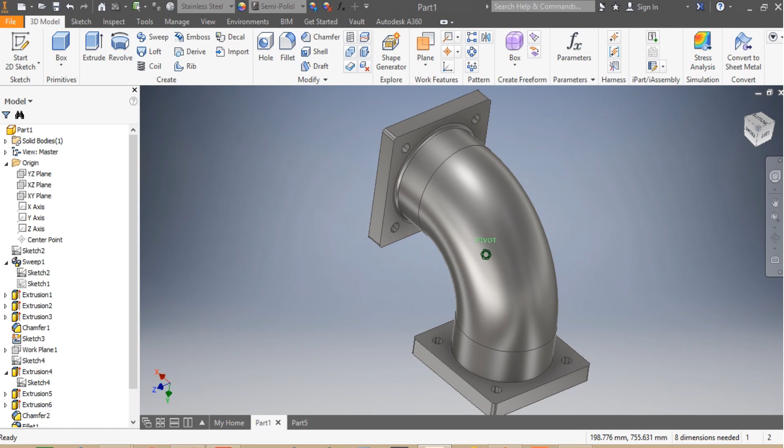Hi, today we're about to do the modeling of this elbow that you're seeing in front of you. I'm going to show you the dimensions. As you can see on the sketch, the dimensions are in millimeters, so I'm not going to waste any time.

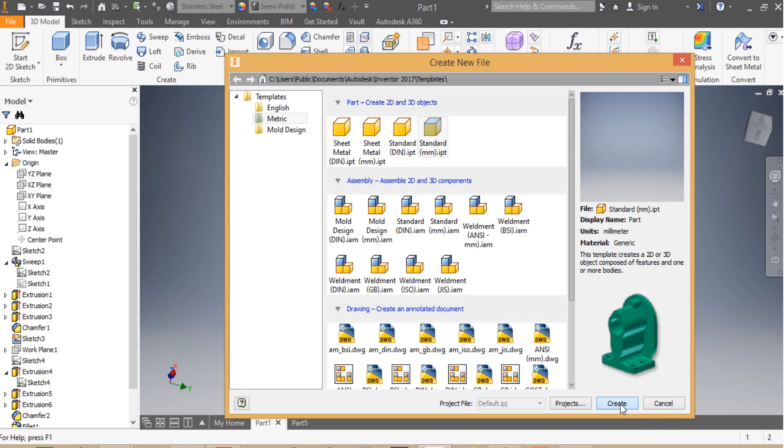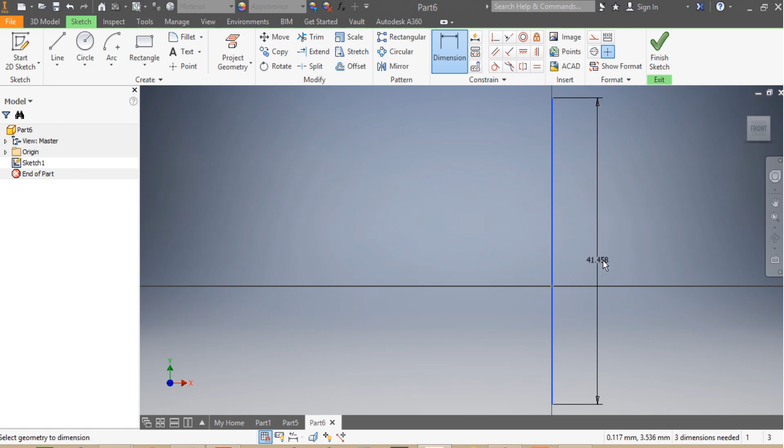What I'm going to do is go up there and select new sketch. Since dimensions are in millimeters, we're going to select that. Here I need to make sure about my drawing origin, so it needs to be in the XY plane. So here I have to draw this line, remember this line is just for guidance, and now I want this one here to be 900 millimeters.

Once I get this right, what I'm going to do next is draw the axis, because for this drawing I need to use the sweep function. That's why I need this to be 150 millimeters, so that is 150 millimeter, 150.

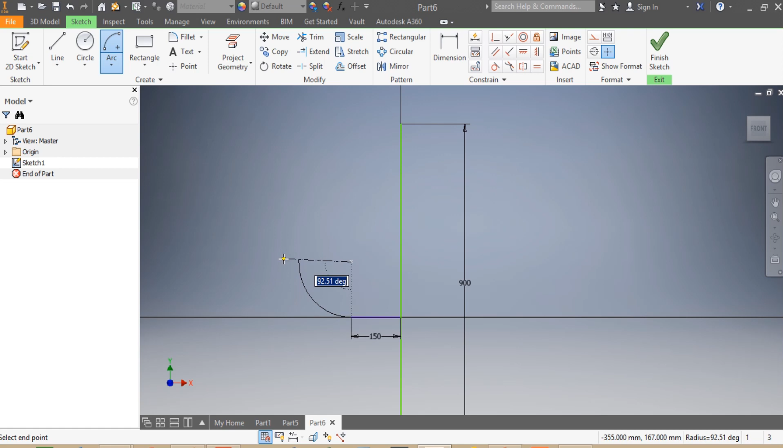I go there, then I draw this arc, which is still part of the axis. That one needs to be 260, that needs to be 260 millimeters. So that is done, I need to make sure now that my arc is tangent to my line.

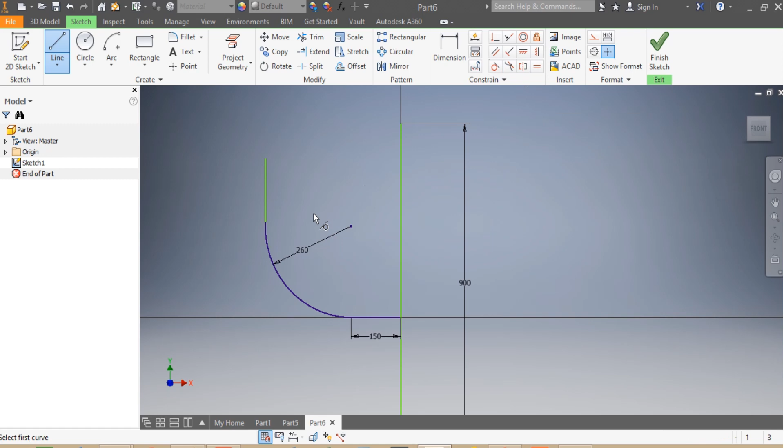The next thing I have to do now is this other line. I need to draw this line, that is my line, and I need to make sure, even though I might know that it's tangent, I need to confirm it. So that needs to be tangent to that one, correct?

Now I have to trim the excessive part. That is excessive, I need to trim it. The next thing I have to make sure about is the dimension, so that one needs to be 150 millimeters.

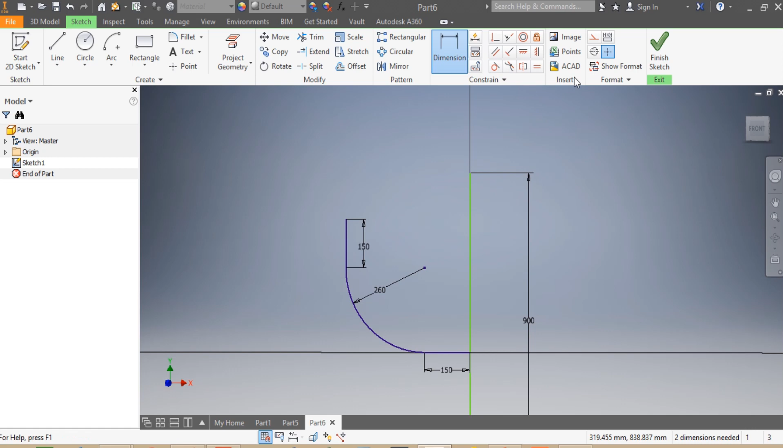Once that is done, what I need to do now is put that one there. Escape. I need now to put this one here as an axis, so that's an axis, so that's one there. I click there, this one as well, I click there. Since that is done, I go and say finish sketch.

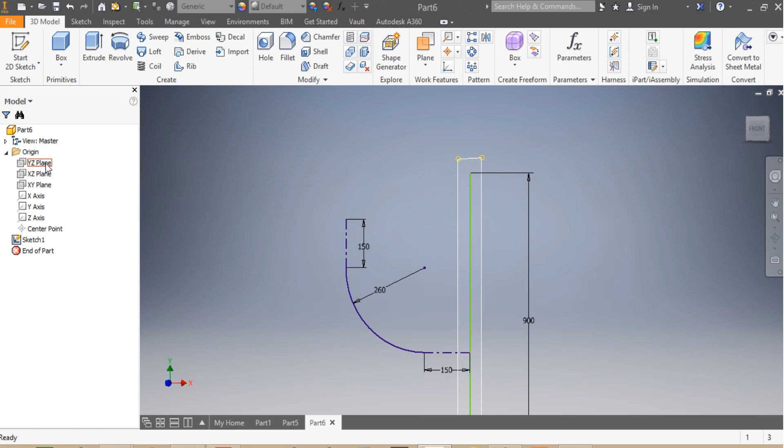Then I come here on the origin, so I need to draw the profile. I need to draw the profile, and then I say new sketch. Then I come here, the next thing that I do again, I just draw my line. So my first, escape, my second, that is my second.

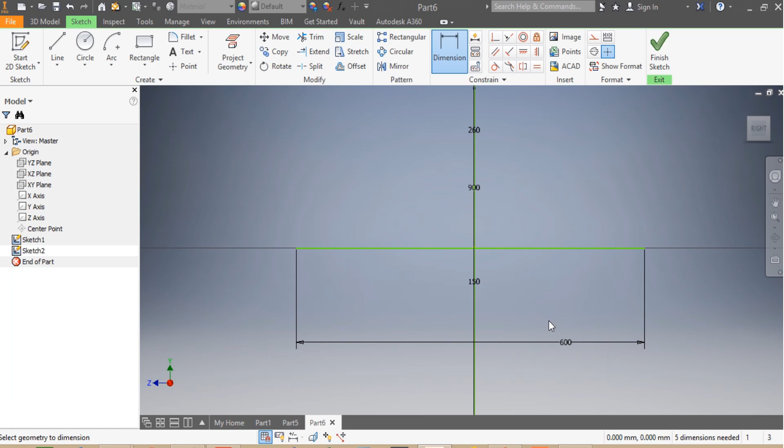Escape again. The next thing that I'm going to do now, let me just give dimensions to my line. So that's one, let me make it 600. It won't kill the cat. 600, so that's one, 150 is fine.

Escape, and then here I'm going to draw my circle, my first, my second, and this one here needs to be 290. That one needs to be 290, so that is 290 as per my sketch. And this internal diameter, that one needs to be 210, so that is 210. So now I get that one straight.

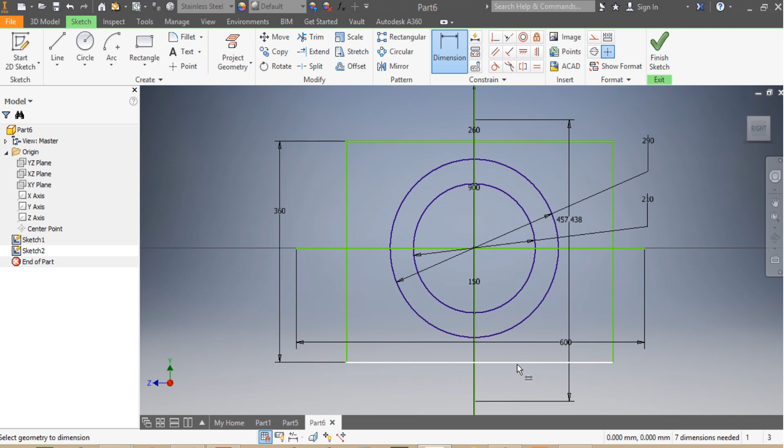The next thing that I have to do, I need to draw my square. There is my square, as you can see there. So this part here, I need to draw that part. And those sizes according to the drawing need to be 360, so that needs to be 360, and this one needs to be 360 as well.

That is done. The next thing now is to make sure about the symmetry, so that needs to be 180. So that needs to be 180, and this one as well needs to be 180, so that needs to be 180.

This might take time, but don't worry, you're going to get there. So I need to draw this one back there, I need to drag it back, I need to drag it back there, so I'm going to drag it back there.

That is done. The next thing that I need to draw now are my holes, the holes to have the elbow fixed wherever it needs to be fixed. So my third circle, my fourth, don't worry, I'm going to fix all of those things, the internal ones, I need to get those right.

And then I need to give dimensions, so that one needs to be 30 millimeters, so that needs to be 30 millimeters. This one here needs to be 60 millimeters. This here needs to be 30, that one needs to be 60.

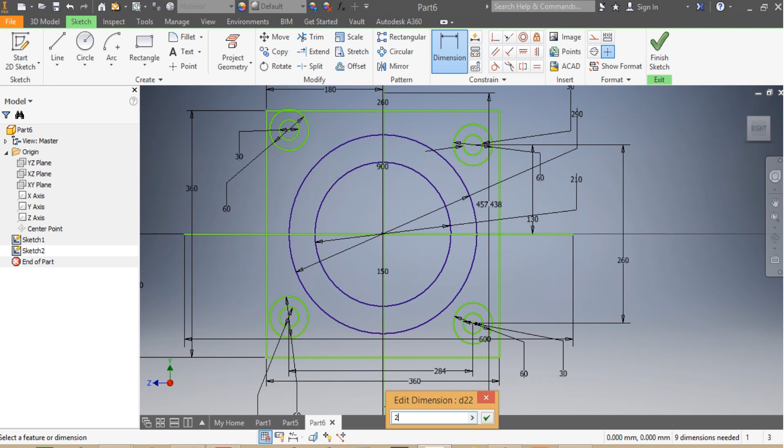130. So the same thing must be applied here. So from there to here, that one needs to be 260 millimeters. Now from there to here, that one needs to be 130. Right, so that needs to be 130. And again, from there to here, that needs to be 260, right? So 260.

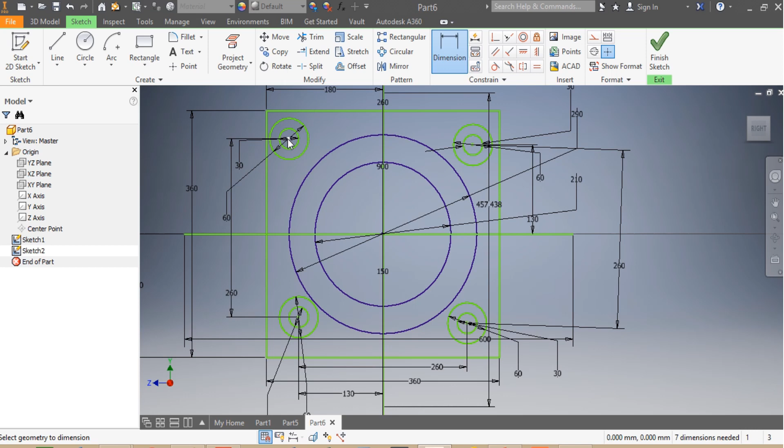And here, that needs to be 130. And the same thing applied there. So from there to here, that needs to be 260. And here, that needs to be 130.

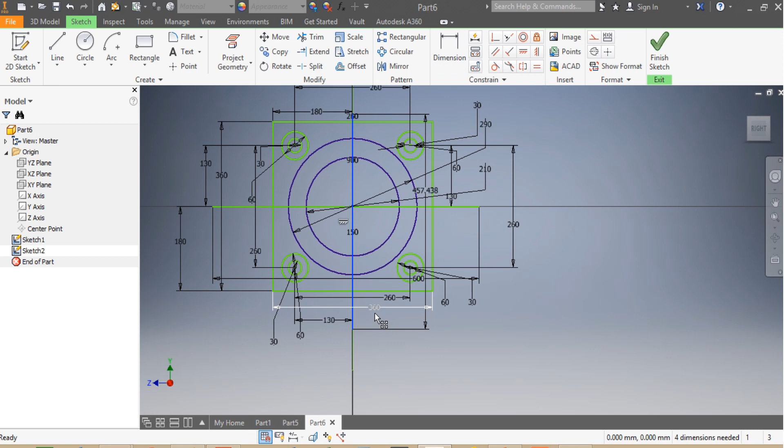Great, so that is done. Okay, everything is done now, everything is great. So I'm happy with what I'm seeing in front of me. So now what I'm gonna do is I'm gonna say finish sketch.

So once I say finish sketch, what I'm gonna do next is come here and press the function sweep. There is a profile. I'm gonna select my profile, the path, that is my path. Okay, then I want it to go the way it's going, and then from there I'm gonna say okay.

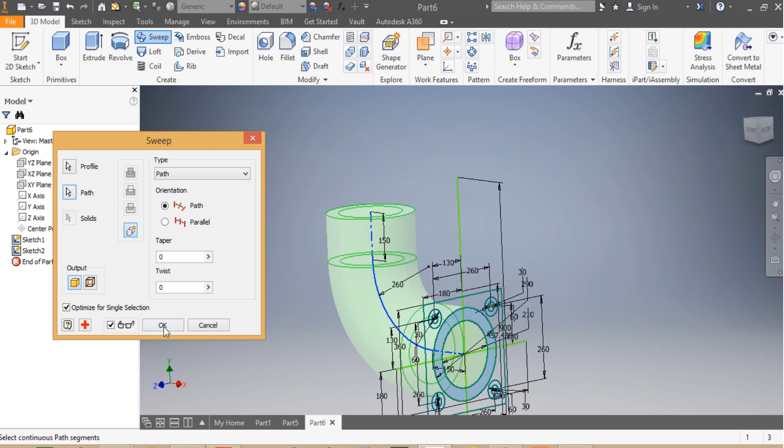So the next thing that I want is to see my sketch. I want my sketch to be visible. Once it's visible, I go on Extrude. I click there. Okay, I want this one to go back.

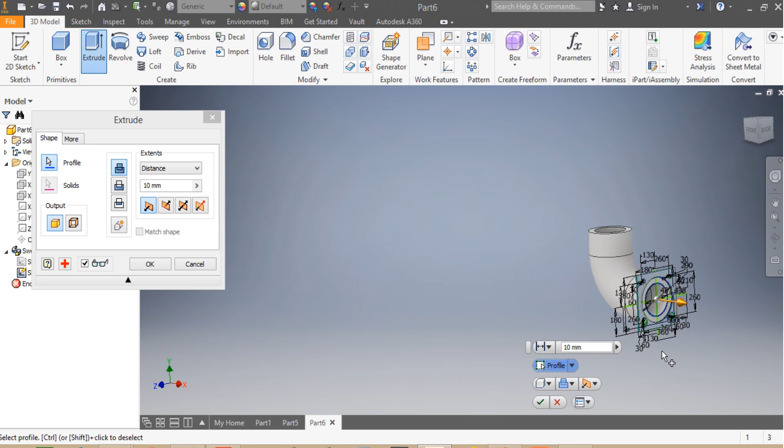Let me even choose this. Come here. You too, don't worry, you are part of the team.

So I want it to go back to be extruded by 50 millimeters, and I want it to be extruded the other way around, not to the side, the other way around. So that is done, I see.

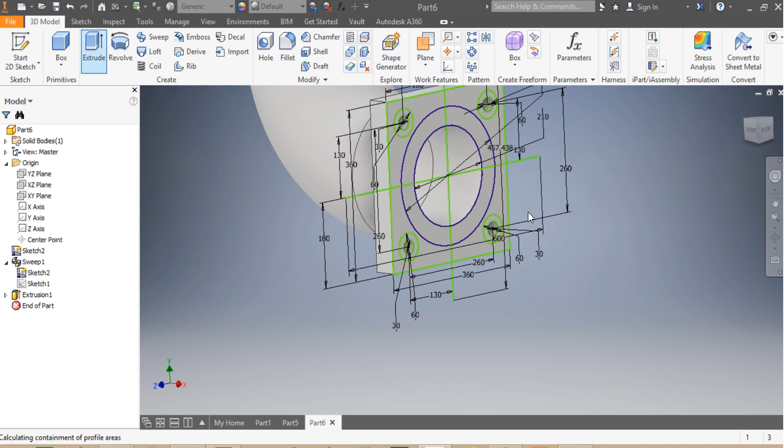Okay, the next thing that I want is now to put this step. I need to have a step there. So here, come on, escape. Please bear with me, don't worry.

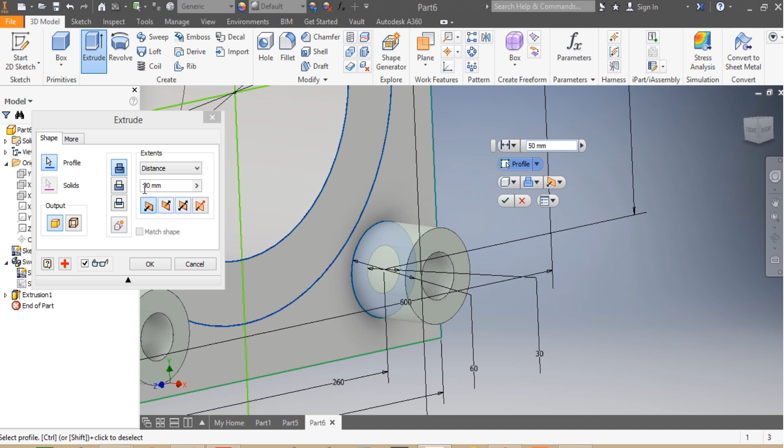So that port, this port, that port, and then I see 10 millimeters. So 10 millimeters. So the other way, then I'm cutting it. So that is fine. Am I cutting it correctly? Then I say okay. So that is great.

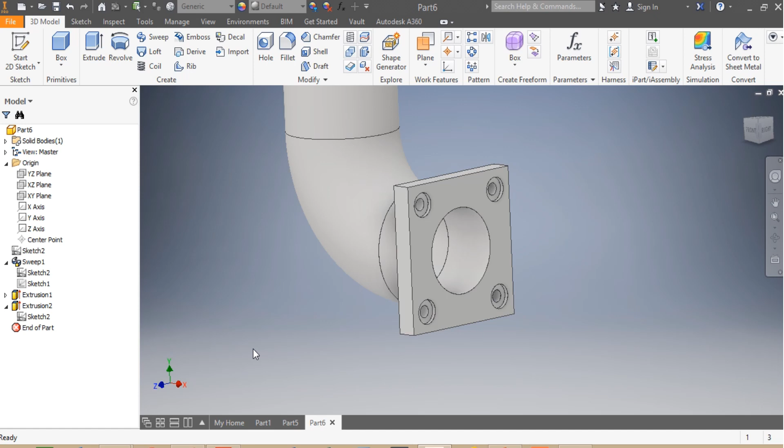I come back here. Where is it? D. And that's one. Visibility removed. Okay, so I'll get this port. The next thing that I want to do is the same on this other side.

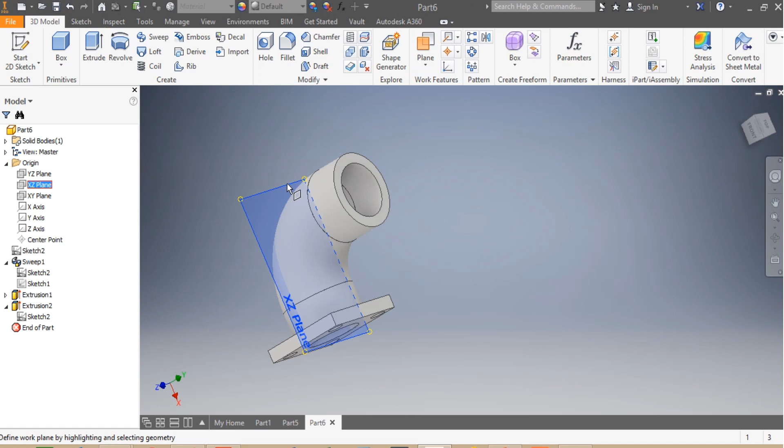So now this is what I'm gonna do. I'm gonna go on origin. So ZX or XZ, I press it and then I go plane. I press plane, then I drag it up. So there I need it to go up to 410 millimeters. So 410, I say okay.

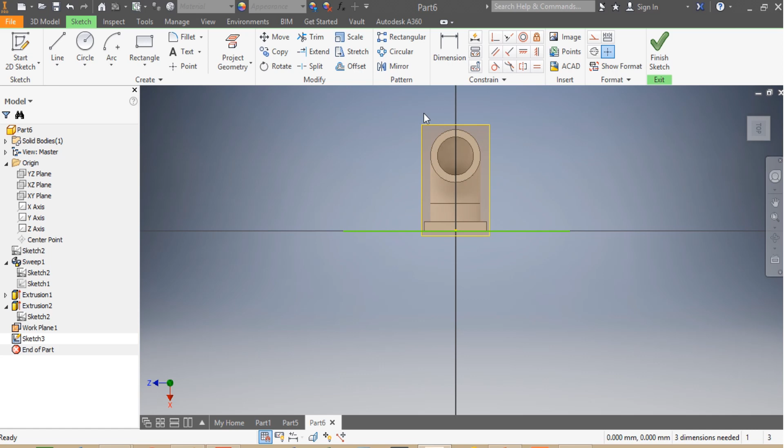Then I come here, I click on it, and I say new sketch. Remember, these lines are important, just to avoid any confusion. So you have to have these lines. So that is my second line. These are for guidance again.

So I want the second line of mine to be parallel to the first one, and I want the dimension from there to here to be 410. So that needs to be 410. It is 410. And the next thing that I want to do now, let me get my other line.

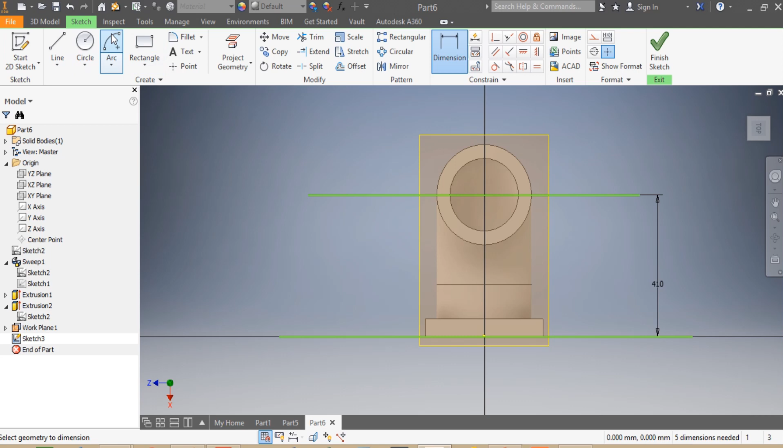I need to get this other line of mine. So that's one. Thank you so much. Thank you. And now I have to draw my circle, my first, my second.

Come on, be serious. And then I need to give dimensions. So I know that one needs to be 210. I like it. That one needs to be 290. Yeah, 290, that needs to be 290. I like it that way.

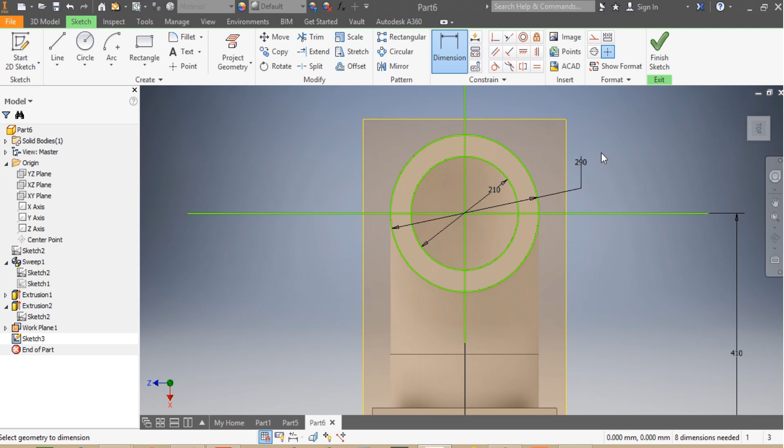And then here, what I need to do now, I need to draw my square, this one over there, and I want all the dimensions. That one needs to be 360. That needs to be 360 millimeters. And this side here needs to be 360 as well.

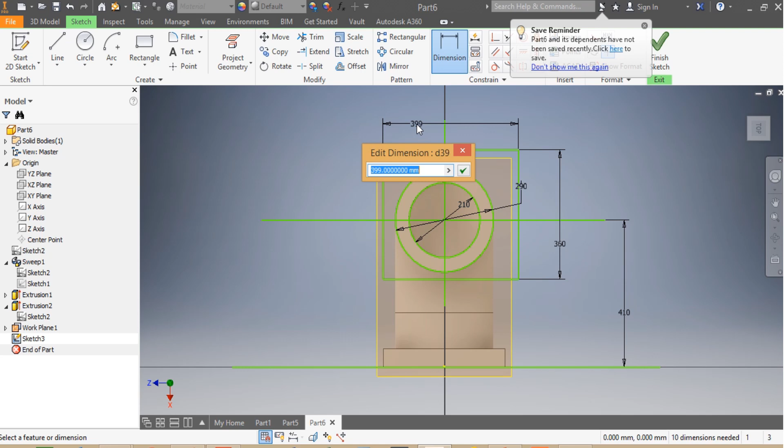360. And here now, so from there to there, that one needs to be 130. 130. And this 130, what did I do? Yeah, that's 130. No, sorry, that needs to be 180. Come on, 180. That's great.

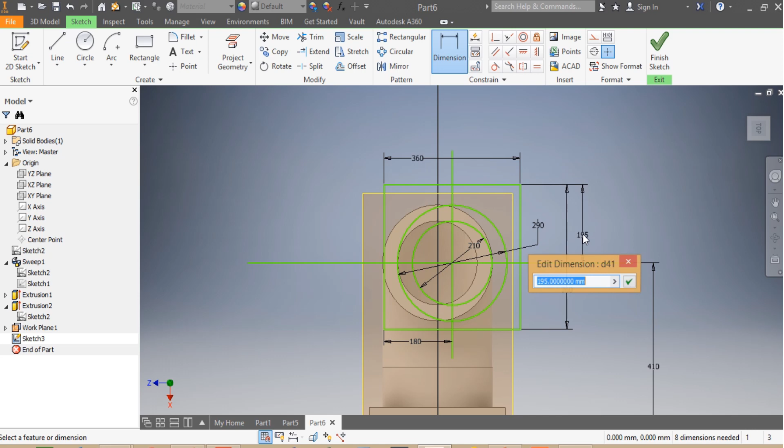And now from there that one needs to be as well 180. That's great. So the next thing that I want to do is drag my lines back. So I want this to go back.

So I come back here now. I want this to come back here. Great, so that is fine.

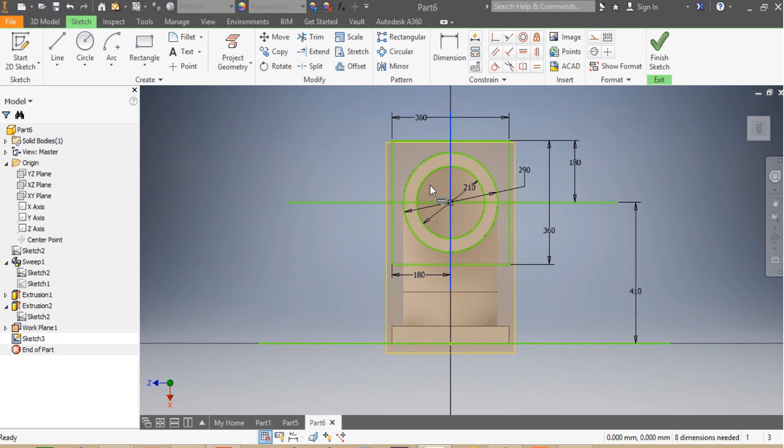Everything is fine. So the next thing I want now is to draw my holes. The first one needs to be here. The second one needs to be here. The third one needs to be there. The fourth one needs to be here.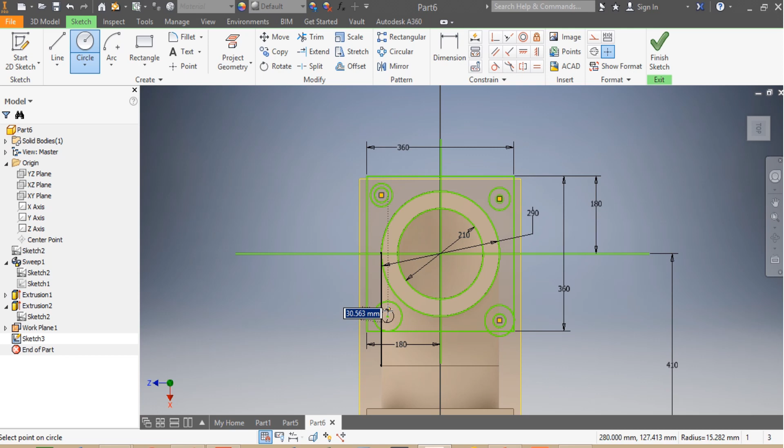Come on, that's fine. My internal circles, my internal one, my other one. So the next move now is to give dimension.

The next move now is to give dimension. So that one needs to be 60 millimeters. This one needs to be 30 millimeters. I need to have 30 millimeters.

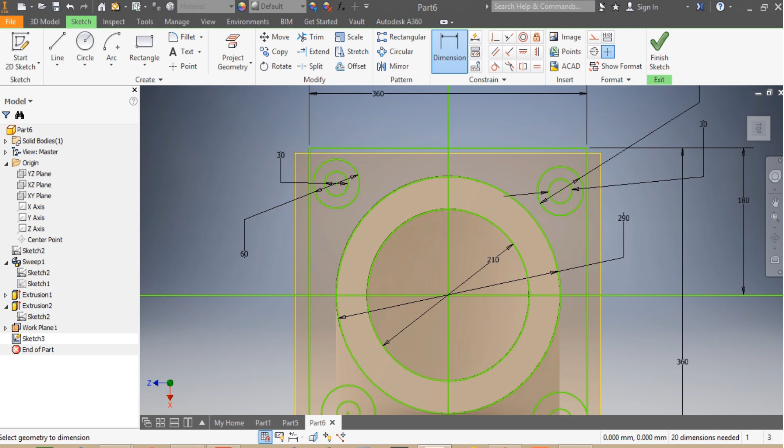Again, that one needs to be 60 millimeters. This one here needs to be 60 millimeters as well. That one needs to be 30 millimeters.

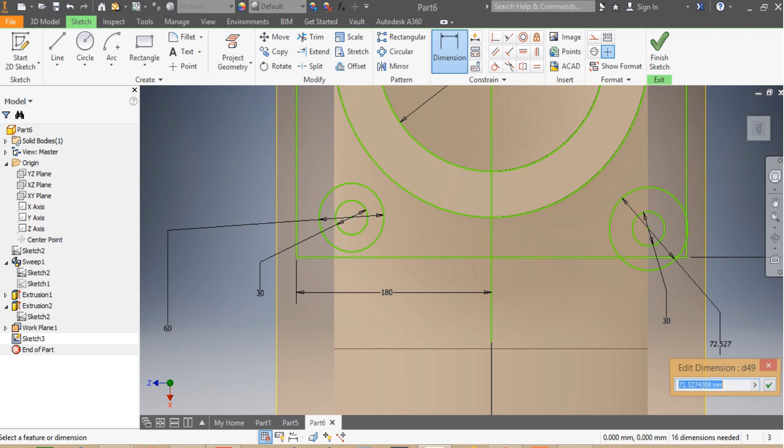You need to be 30 millimeters. And then at last now, that needs to be 30 millimeters. So that is done. Now what I need to do next is to give dimensions.

So I want from there to here to be 260, so that needs to be 260 millimeters. And from there to here, that needs to be 130. I come back here.

So from there to that needs to be 130. Or else you can just draw a line here, but I prefer doing them on curves. So that one needs to be 130 as well.

And from here to there, that needs to be 260. And from here to there, that one needs to be 130. Alright, so that is great.

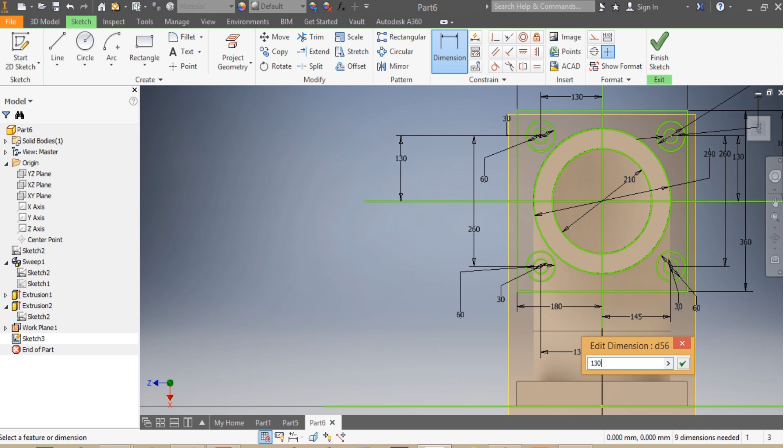And then here, do I have that one? Not yet. That needs to be 130 as well. This one here needs to be 130. So I got that one, I got this one, I got everything.

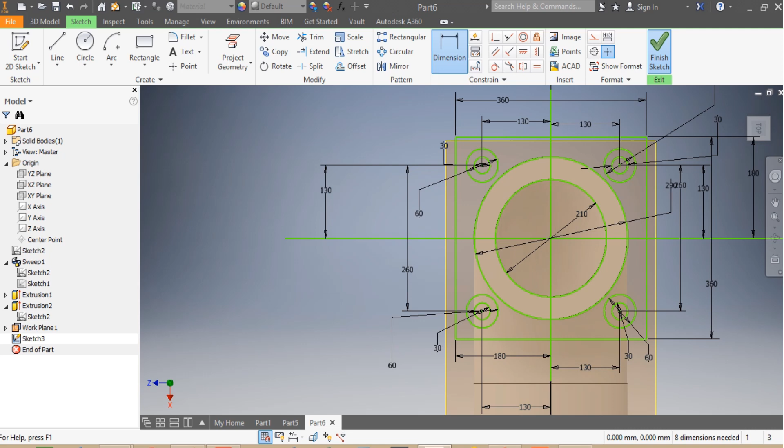Everything is correct, okay great. And then here I see, yeah, I think everything is done, right? Okay, finish sketch. I come here, I say extrude.

Now I want to extrude this part by 50 millimeters. Let me come inside here. I select you as well. You too, you're part of the game.

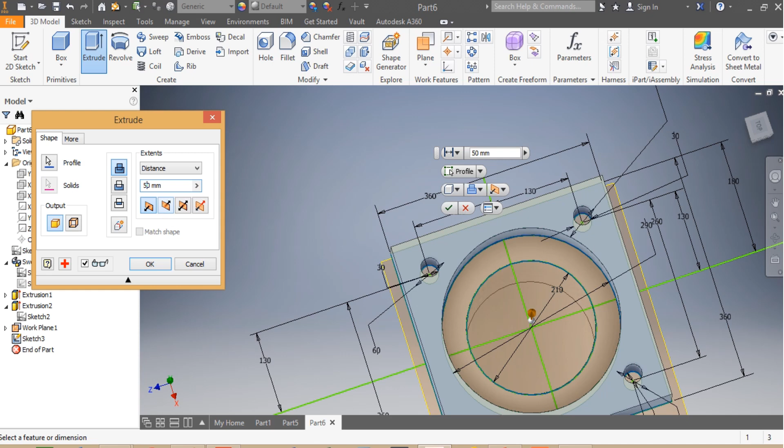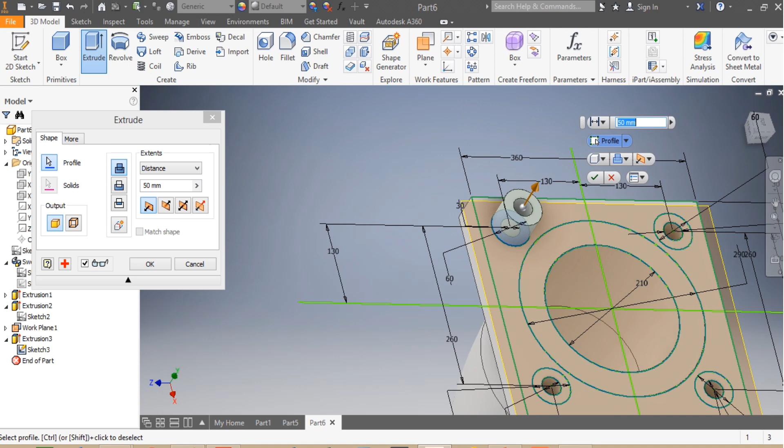Again, where is it? Visibility on. Extrude again. So this part, that part, this part, and that part, I need now to cut it by 10 millimeters, so it's not gonna go inside the other way.

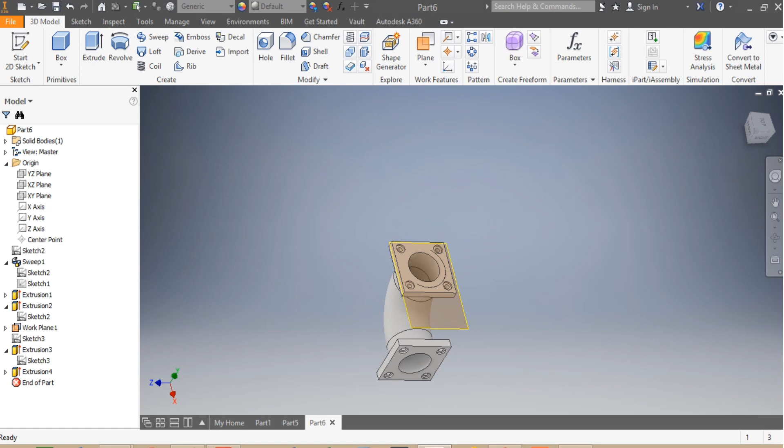I say okay. The next thing that I want now is to remove visibility. So visibility removed. I want to remove the visibility of the plane as well. Removed. So this is how your drawing looks like.

Alright, so I think now what I need to put is my chamfer inside, so that's one over there. Need to go inside by 10 millimeters.

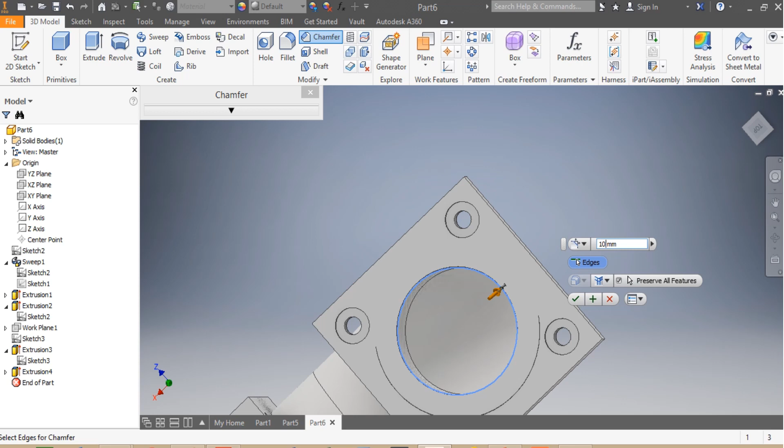Okay, I come this side as well, this side as well, so here as well, 10 millimeters. So that's one, 10 millimeter. Done. So I need to kill the corners.

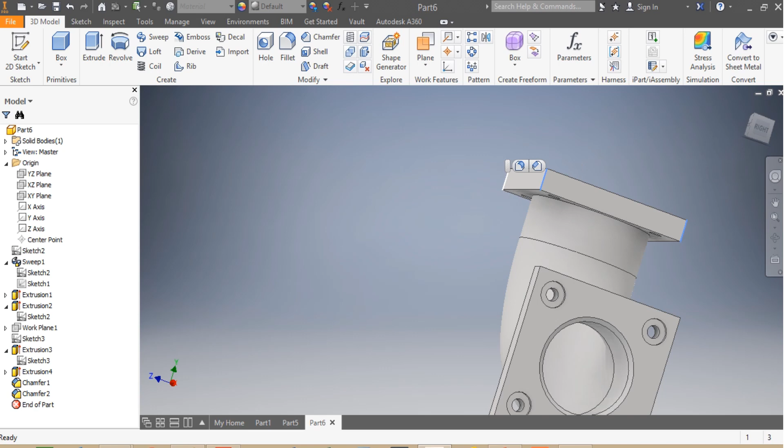I need to kill the corners. Okay, so I select that one, I select this one, that one as well. Okay, this one, that one, all the corners, this one as well, as per my drawing, that one.

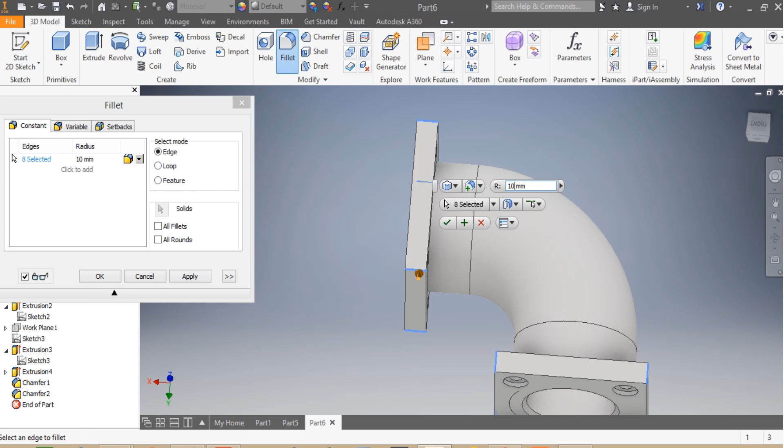And at last, this one. And now this needs to be killed with 10 millimeters, so 10 millimeter radius, great.

Okay, so I can also kill that side, 10 millimeters. So however you want, the mouse is yours. You can do whatever you want with your mouse. So this is your conception.

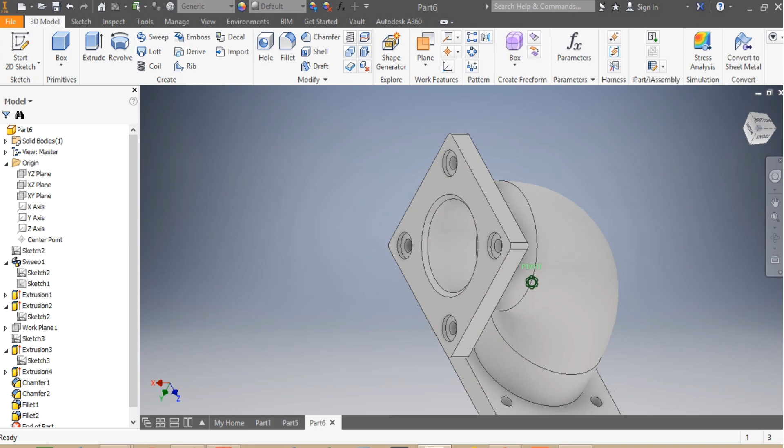But before leaving you, while expecting to see you on the next video, what I'm gonna do is give the material to this pipe of ours, or this elbow. So I want this to be, let's go, stainless steel. Shiny, yeah. So this is great.